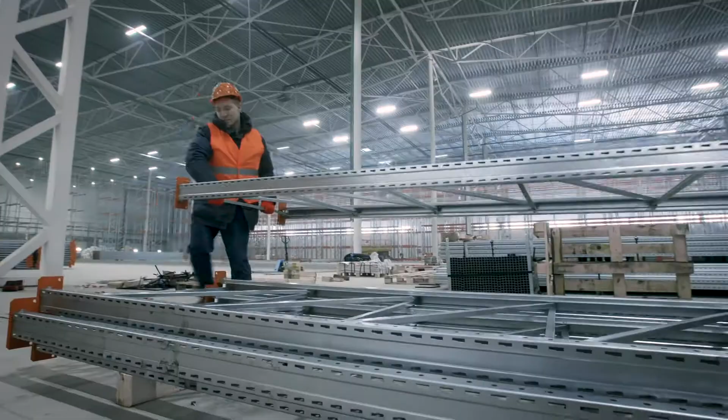Before CMMS, there really was none. It was just everybody ship and bill, and it was on the customer theirself to manage their own material.

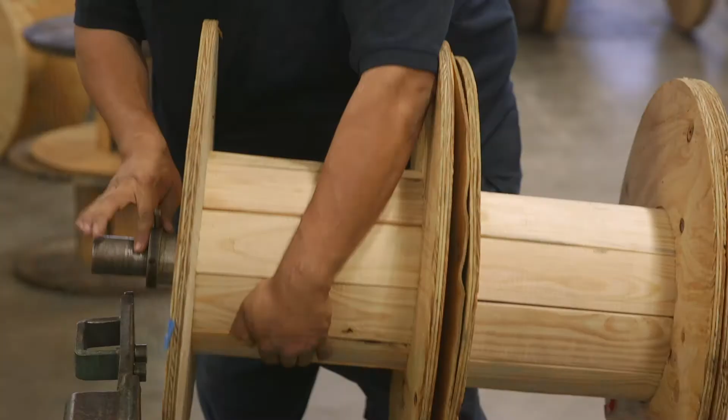The thing that makes CMMS unique in the industry is we actually dedicate the facilities, the inventory, the personnel to support a capital project. We're talking about low dollar, high volume of electrical materials that is in our DNA. We're not a distributor, man. We're a construction company.

Wholesale Electric was founded April 1st, 1949 by Mr. Clyde Rutland. In early 1990, I believe, we decided that CMMS needed to have its own standalone warehouse and facility.

The inception of CMMS was started at a client request. They were having a hard time managing their materials, especially cable at that time, and we devised a method to be able to do it by circuit to keep control of the cable until they needed it.

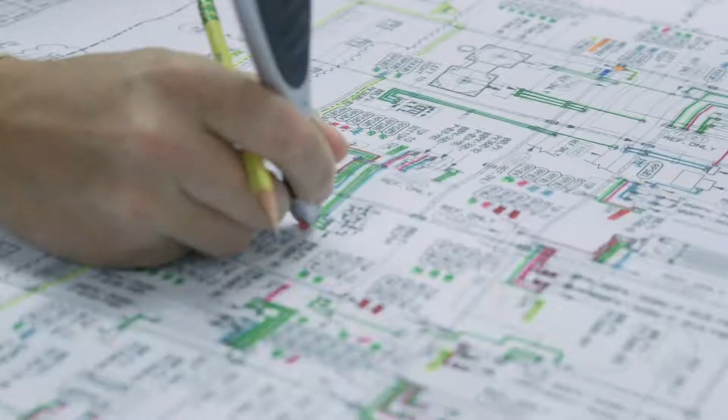We eventually got to a point where we were doing the MTO takeoffs for the project and running it through our house-made or homemade system to provide what is now CMMS. CMMS is basically a construction material management system.

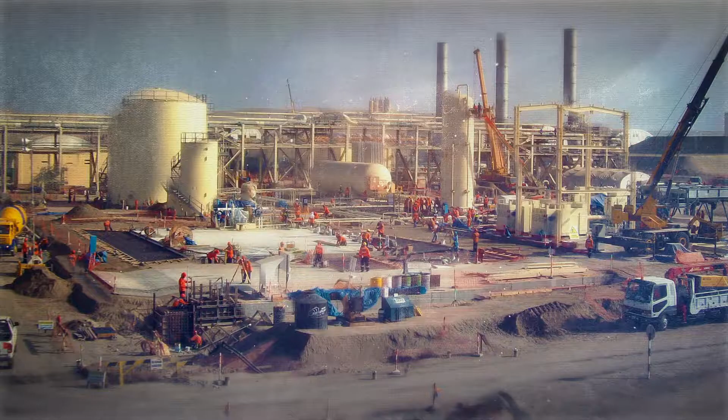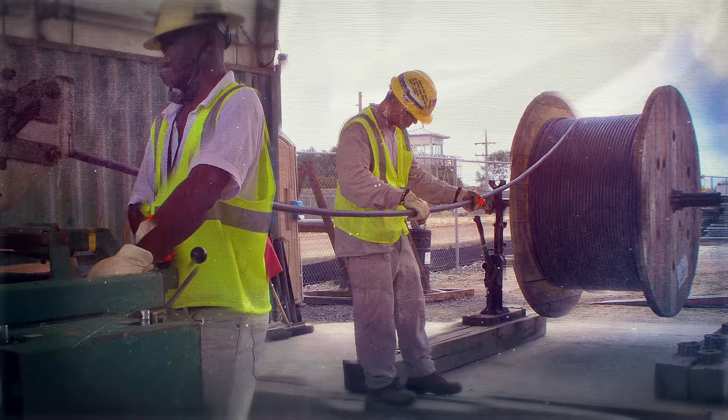In the very beginning, it was a lot smaller, and we intended to keep growing as we became international. We want to come in and be a part of the team. Once they've used CMMS and see the value of it, they usually want us right back to do the next job. CMMS has always been in the front of construction and really in technology.

We're able to create on-site management and also cable management. In the early 2000s, we went to an internet-based system. That business unit is to support capital projects.

The biggest thing we always tell the customer is early involvement. Let us get involved, make sure you're picking the right materials that are readily available and are returnable back to the manufacturer. Manufacturer relationships are just as important as your customers. You need those guys to help us move material as quick as we can.

Everything's always changing. Expect the unexpected, right? There's just stuff always coming at us. It's a fire drill every day. It's a partnership. The planning is the first thing we do.

Normally we'll have a big kickoff meeting, and from that point we just decide what are they looking from Wholesale Electric to provide them, and what are we needing from the customers in order to make this a successful project.

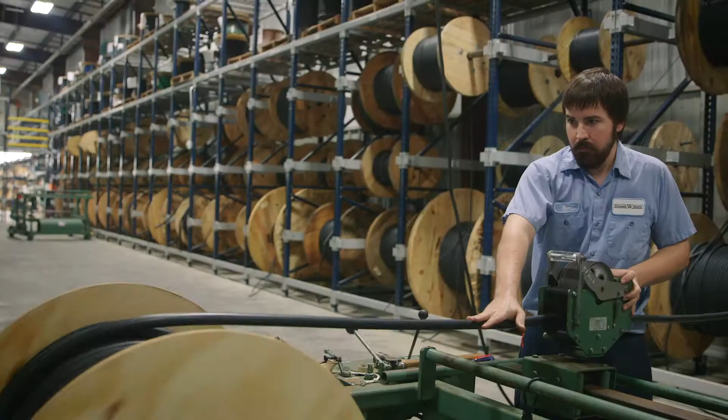After the planning stage comes the identification of the material. One of the good things about identifying the material up front is continuity of material, and it eliminates mistakes.

The main key component is the quantify stage. If we do a takeoff of a drawing, then we're going to be holding ourselves responsible for that takeoff. We're saying that this is how much we see that you're going to need, which is obviously going to be a huge plus for the customer. We're trying to do that at the best price possible to you, and that's what we're going to hold ourselves accountable for.

Reviewing is always important, because then you know before you do any sort of ordering that you're getting the right material. You know you're getting the right amount of that material, and you know that it's the right stuff that you're going to need.

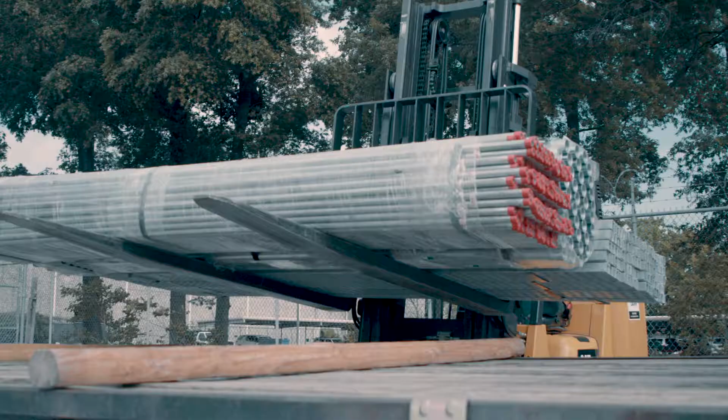The releasing process is one of the key components to CMMS. By releasing just-in-time delivery for the project, it allows them to save lots of money. Those two things alone are really big for us here at CMMS.

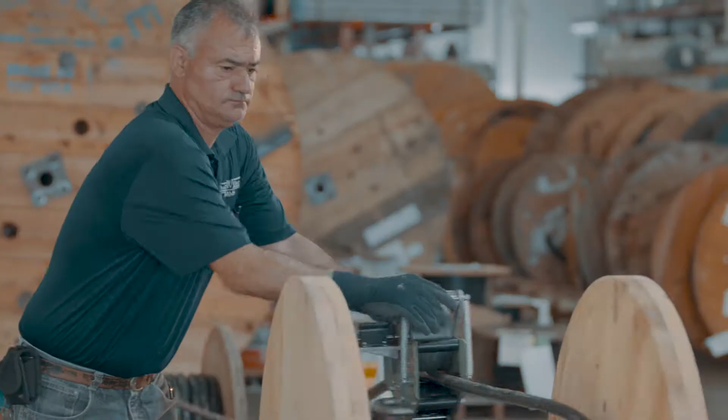Everybody within their entire organization exhibits the honesty and the integrity that we're looking for. They tell you right up front when you're going to have a problem. They help you through all the issues. They're here to help us for the long run, and so every decision that we're both making is based on that long-term relationship.

One of the reasons we liked dealing with Wholesale was they could give us an insight of what material was needed at what time frame. We could gauge our manufacturing and keep a labor force working year-round. It's kind of a one-of-a-kind that other distributors don't offer it.

I would have never came over to Wholesale if I wasn't convinced that this process works, brings in the project on time, under budget, safe for everyone.